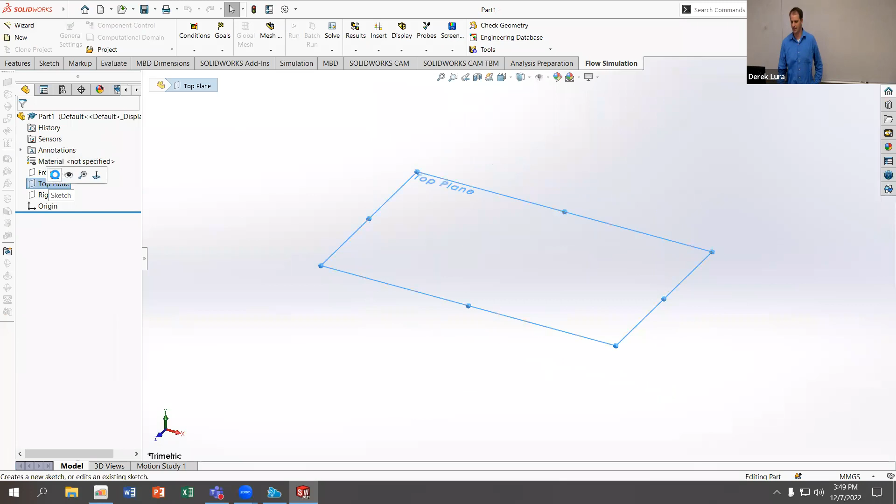So I'm going to go to the top plane and sketch a somewhat reasonable, complex geometry, whatever you want to call it, a generic shape.

I really don't like anything being underdefined if I can help it. Since this is just an example it doesn't really matter, but I'm going to throw some dimensions in on this part because I want to. So I'm putting in some relations.

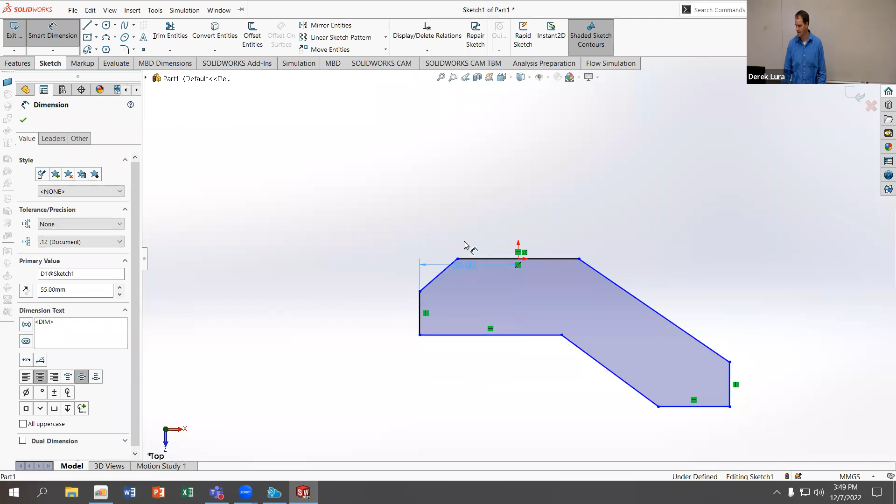I am going to try and get as much as I can dimensioned relative to the origin. Dimensioning things relative to your datums, to your origin, is always a good idea. The fewer chains I have in my dimensions, the better — the more resilient my parts are going to be, because changing one thing will have a smaller impact on the rest of the part.

Also, adding relations is typically better than not, because if I have relations and I change something, the relations will allow the parts to scale in an appropriate way.

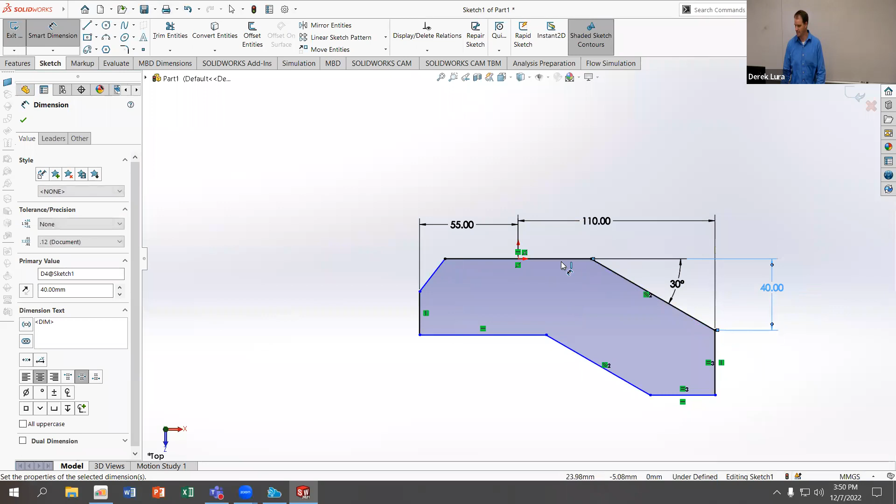So again, I'm trying to keep everything down to a single set of datums, using my origin for horizontal, and this top line, which is equal to the origin, for my vertical. I have values here that are kind of all in the tens, which is good to keep track of, because if I want to do something later, I have some idea of the scale of my part.

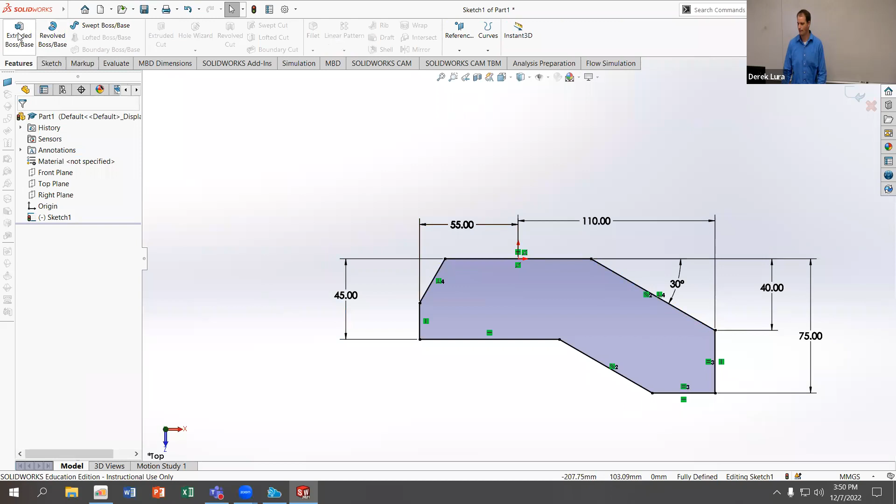So I'm going to extrude this. I'll use a mid plane — let's use 40. So this is what I'm going to start with.

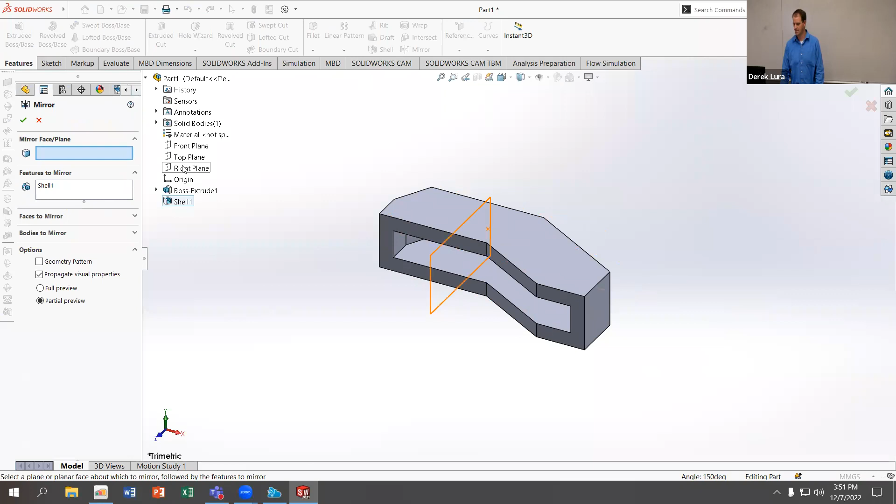And let's say this part, I'm going to shell out the middle portion. And then I'm going to mirror this about — let's do the front plane, not the top plane, the front plane.

Oh, I don't want to mirror the shell, I want to mirror the body. Let's just do both parts. Yeah, it doesn't work. So this is an example of something that doesn't work, because the shell won't mirror the way we want it to.

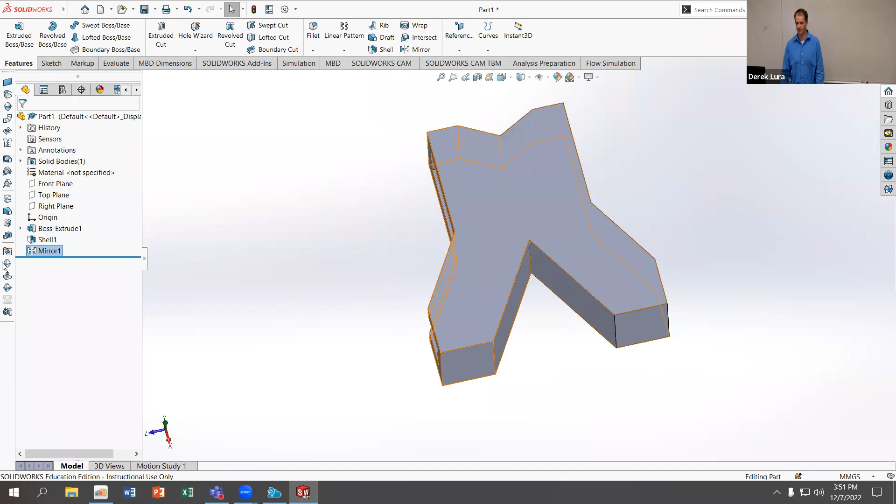So I'm actually going to delete this feature — it won't let me switch a feature mirror to a body mirror. I'm going to mirror about the front plane and use the shell as my body, so I'll do a body mirror instead. That allows me to have this shell on both sides of the part.

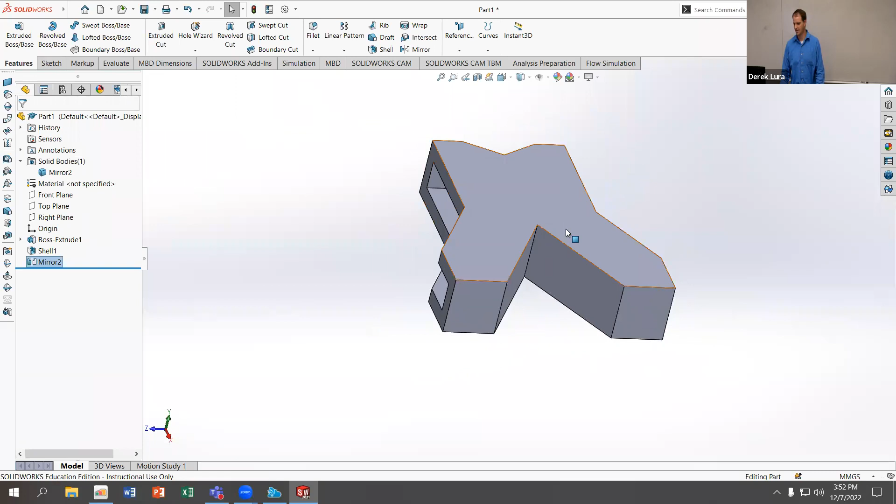And then I'm going to add a fillet to this on the top and bottom, to make it look like it's one piece put together. So say you were given the task of removing half of the shells from this part and maybe doing some other modifications.

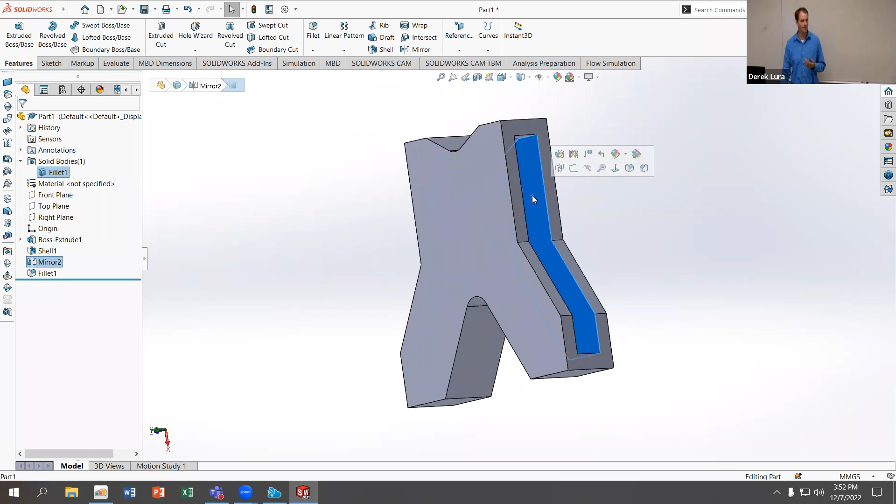How can you do that if everything is derived off of that original piece? Because right now, anything I do to change that feature is going to cause an issue. I can't really get rid of this hole without getting rid of this other hole, the way this part is set up. Does that make sense? Because it's a single body here. But what I can do is change the order that I do things.

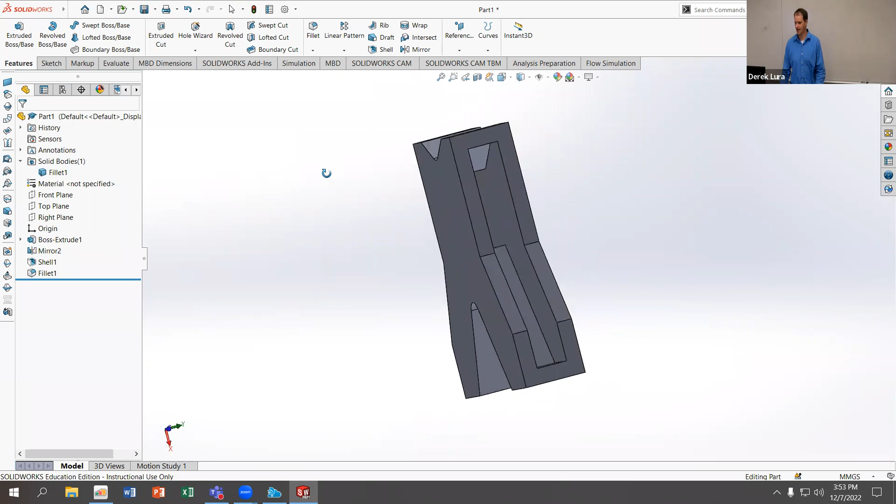So I'm going to move my mirror up above my shell. Now it's shelling, but it's shelling too much — we'll see that because it's shelling out the interior portion, and I only wanted to shell half of it.

But what I can do is, in my mirror, I can unmerge these bodies. Now I have two bodies, right? And the left one has the cutout, the right one does not. My fillet is broken because it's not going on that, but I'm just going to roll back before I have the fillet.

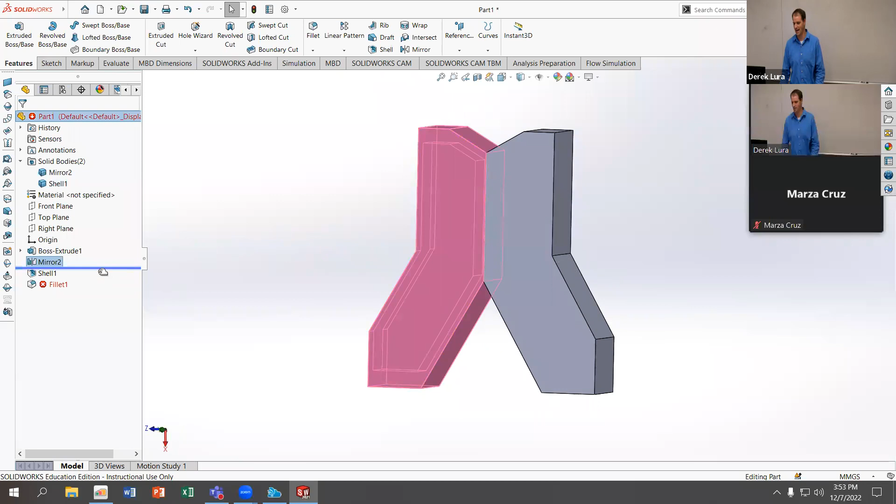And now I can merge these two bodies together using the combine tool — just use add, and I want to get both of these bodies. Then I can bring my fillet back out. Boom, fixed.

So the trick there really is knowing the importance of the order of operations of the tools, and then also being able to manipulate it to treat those things as separate bodies when you do the fillet. You can pretty much guarantee you're going to get a hard question in CSWP that asks you to do something like this, where manipulating the bodies is the quick way of solving the problem.

There probably is a much more complicated way I can go through and fill in this section. Yeah, that's right — because that's harder, right?

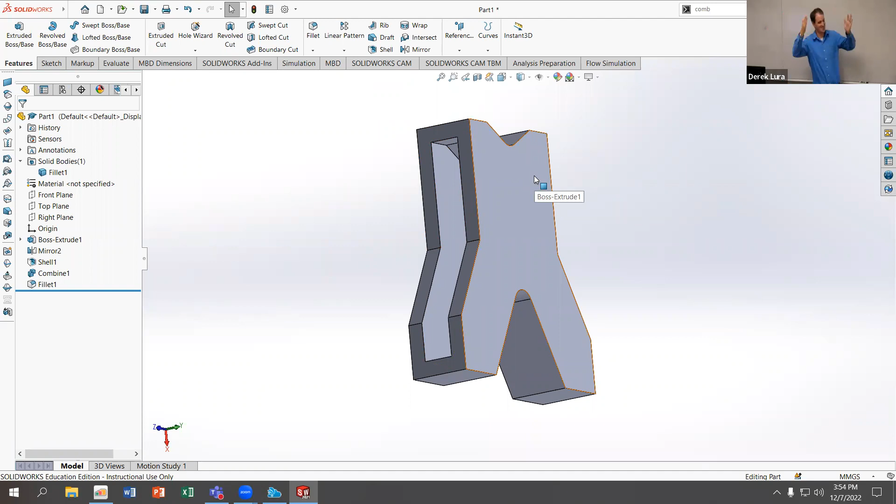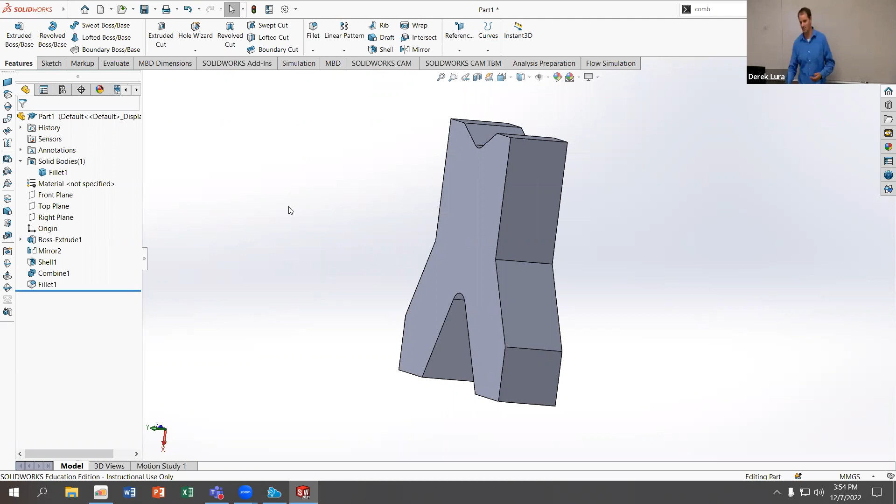Like I could just do an extrude that fills in half of the part, but it's going to be hard for me to get that accurate and also have it be a reasonable amount of time. You may also have the opposite problem, where you have a part like this and you're asked to put the shell onto both sides where it's only on one. In that case, we're doing the opposite operation. I need to make sure I do the shell before I do the mirror, then combine and fillet. Now I've got it on both sides.

Knowing that I can move features around in the model tree, and use my rollback bar to control and add features halfway through the model without having to remodel things, is extremely important to be able to work effectively on CSWP.

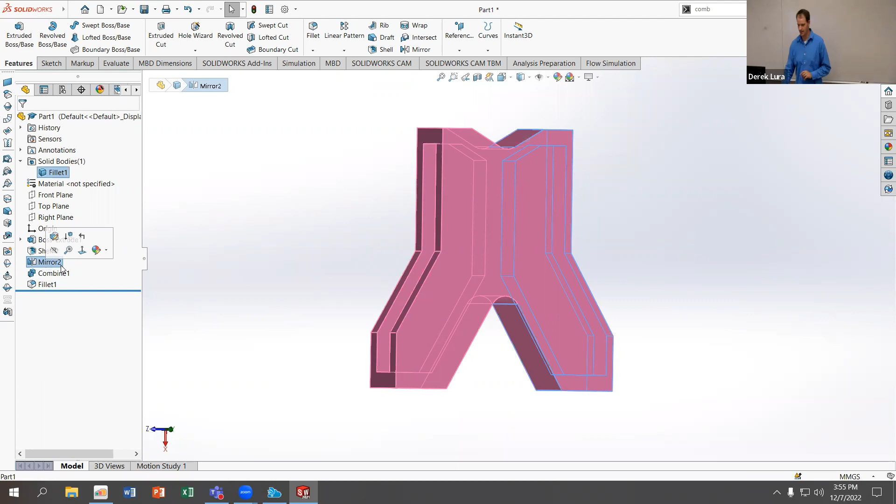Is there any scenario where you would delete an entire feature and recreate it? Yeah, definitely. Sometimes I'm not sure what the scope of the question is, so I might need to completely redo something. A perfect example is if this mirror was a feature mirror and not a body mirror, and I needed to change it—I would need to delete it, because you cannot change a body mirror or pattern into a feature mirror or pattern, or vice versa.

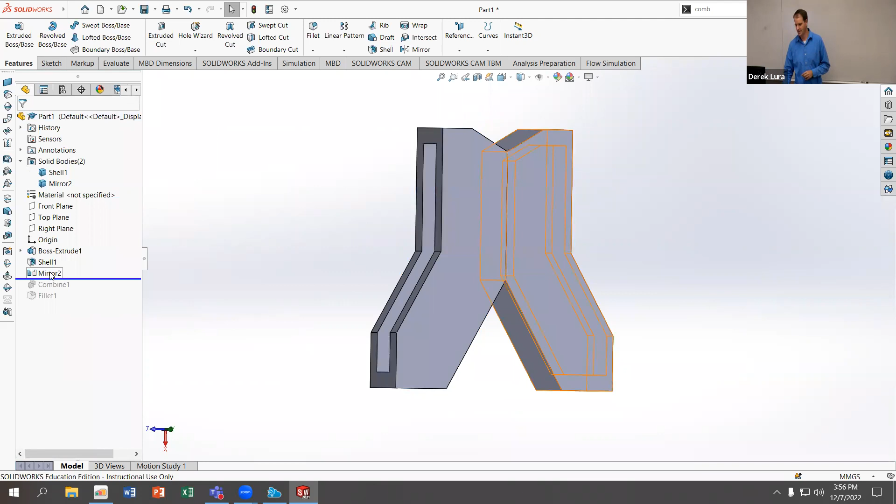As an example, I'm going to go back—this one is the body mirror, which allows me to get the geometry I want. If I delete this one, well, what do I do?

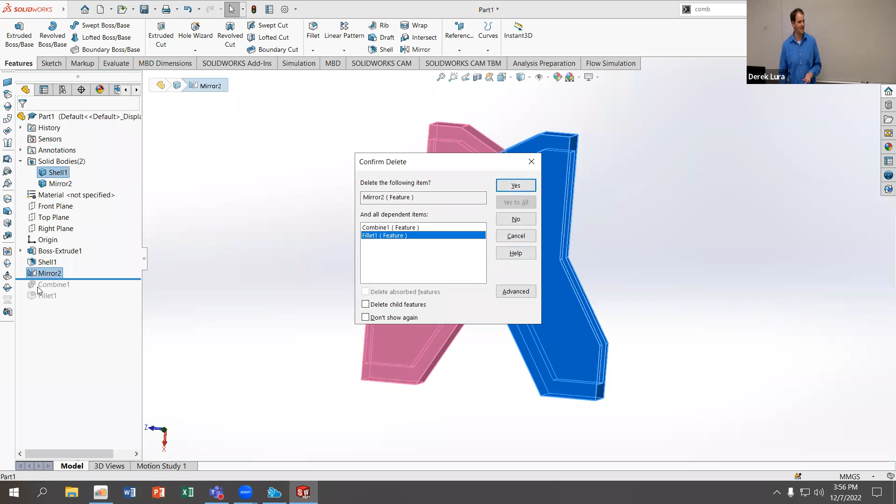So sometimes you don't want to delete dependent features. Usually on a CSWP question I'd have the option to not delete child features. This one, because it's no longer going to have two bodies, can't use the combine tool. So I'm just going to go ahead, and yes, I can always put it back in there.

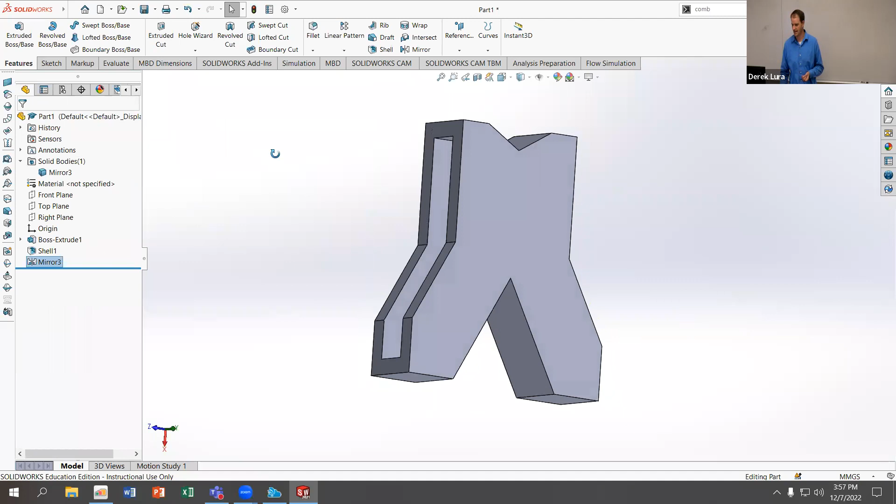Now I've gone back, and I can do a feature mirror using the front plane—sorry, say maybe the boss extrude. Now I'm going to get a totally different result. I did it after the shell.

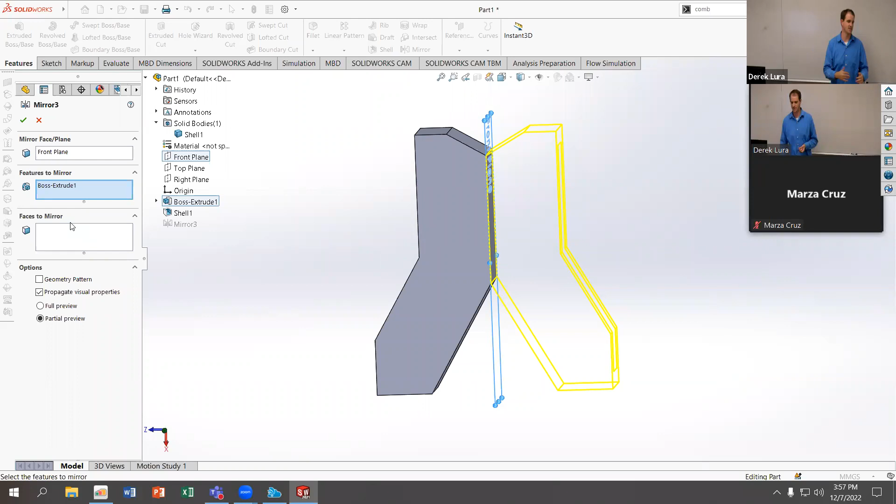I can go back and change this into a body mirror. So if you want to use a feature mirror and they give you a body mirror, or vice versa, you can go back and switch that, and you'll get different kinds of results. In this case, because I did the mirror after the shell, I get that half piece. If I wanted to include this shell, I don't think that actually ends up working out—it doesn't, because it doesn't know where to put that shell after it's merged with the other half.

Would you ever delete like two-thirds of the part, just as an extreme example? I don't think I would do it. I mean, yeah, I would—you could, so it would work, but it depends on how long you think it's going to take you to redraw that geometry.

Also be very careful to preserve any situations where global variables have been defined inside those features. The biggest pitfall would be if you had a hole inside that geometry equal to global variable Q, and you deleted it, and now you don't know what size that hole is supposed to be because it's not given anywhere in the documentation for the part. That's the concern I'd have with deleting things—am I losing information I'm not going to be able to get back?

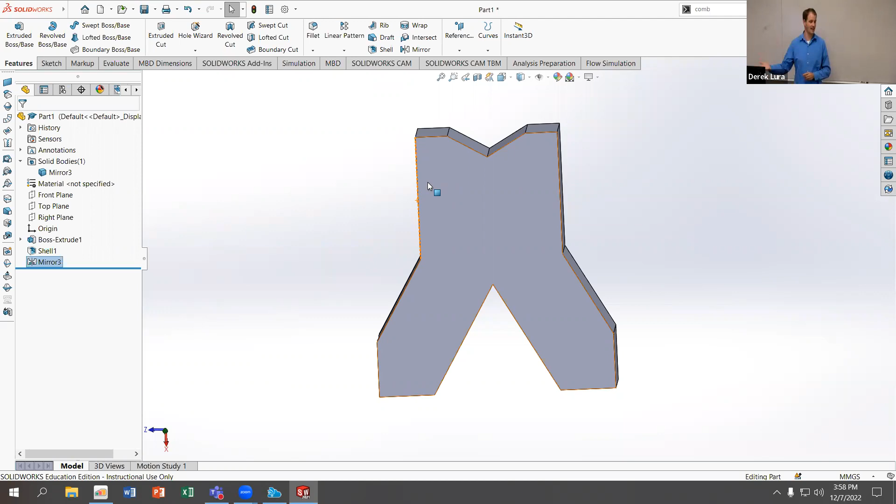So if I was going to delete them, I'd probably investigate with edit feature and see what the relations and dimensions were before I delete it, so if I need to remake it I can. Or save the part as a different file name, start deleting things, and if I can't recover it, go back to the original file, or wherever I was in the last step, and continue.